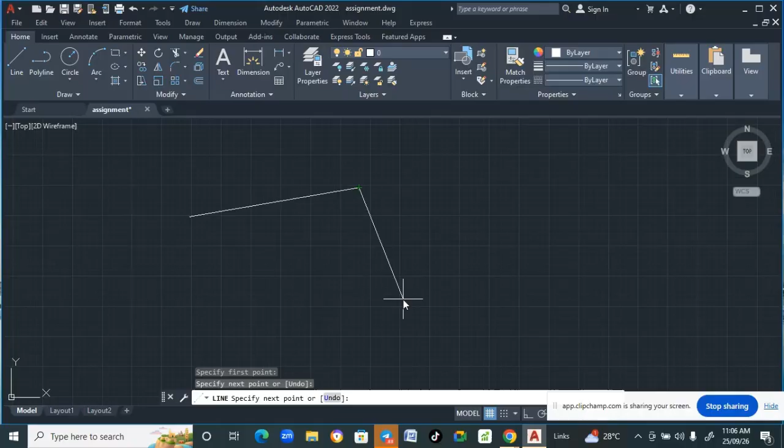Let me start with different ways you can activate the draw line command. You can start from here and just click on line. Remember, whenever you activate the command, look at the command line - it says specify first point. Wherever you click becomes the first point, and wherever you click again becomes the second point. Anywhere you click again becomes another point. If I decide to close this object, I can just click on close, and it closes.

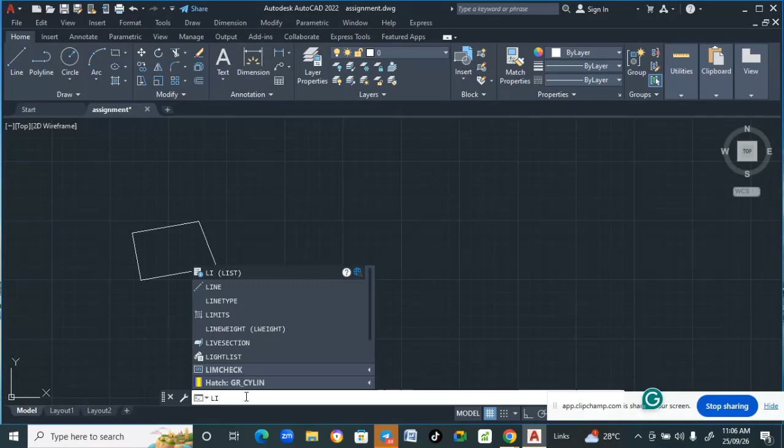Now I can also initiate it from the command line using my keyboard - just draw line, or type LI. If I click on line, the line command is activated. Again, the command line says specify first point. If I click here, it becomes the first point. If I click here, it becomes the next point, and the next, and the next. I can decide also to close it. Then I click enter to deactivate the command.

We can also come to the main menu here, click on draw, get online, and the line command is activated again. Specify the first point - if I click here, it becomes the first point. The next place I click becomes the next point, and the next, and the next. And then I can also close.

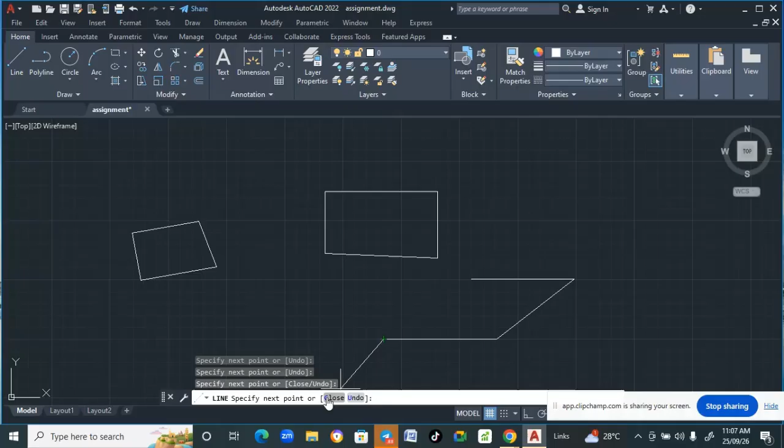Now let me come here. If you come here, you see construction line, you see ray, you see multi-line. It's important for us to understand that line command and construction line are not the same. Construction line is an endless line that you use to create boundaries. You don't use it for drawing. Let me give you an example.

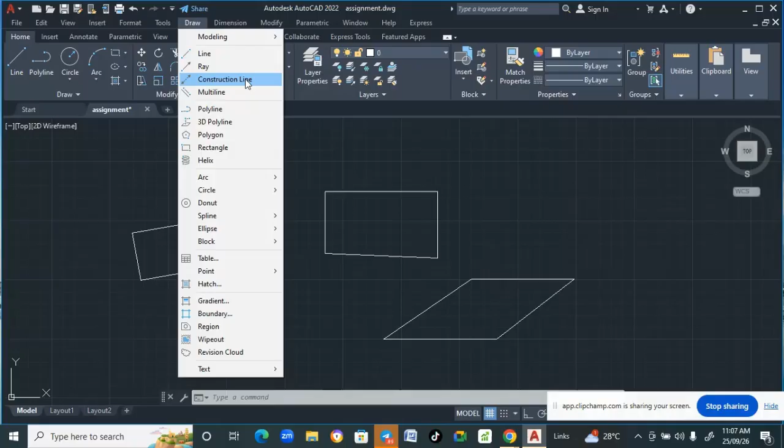If I click here now, the construction line is activated - it says specify first point. If I click here, it becomes the first point, and I click here, it becomes the second point. Then I click enter, and we have an endless line. This line is endless - what it simply did is divide my drawing space into two. I can do some drawings here, and some drawings here. But it is not part of the drawing. So when you want to draw, the actual line you use is the line command.

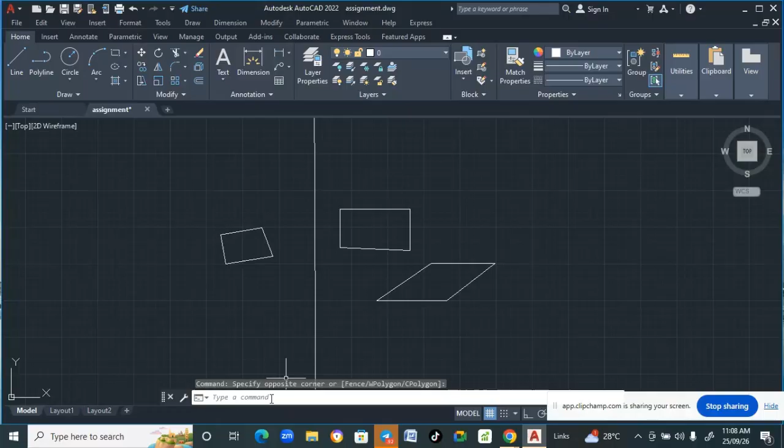Or you just type line here. Okay, so let me clean - just highlight and click delete. So the next thing I want to show you is how do you now make your line dimensioned? Because in engineering or in sciences, you don't just draw a line - you draw a line with specific dimensions.

Let me start by using this command now. If I activate the line command and it says specify first point, and I click here as the first point, and I want my line to go in the vertical direction, I can just point my mouse in the direction I want the line to go - don't click, just point it in the direction - and I type the dimension, let's say 100mm, and click enter. Okay, so you see this line is 100mm.

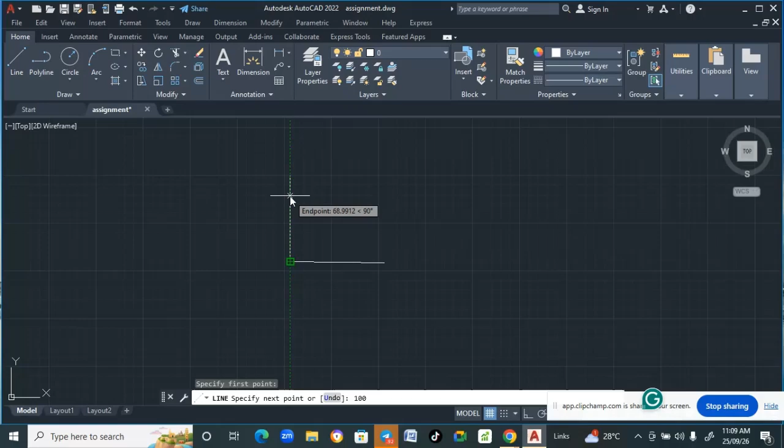Okay, if I activate the line command again and I want to draw another line, but this time horizontal, I just point the line in the horizontal direction, I type 100 again, and press enter. Okay, so it gives me a second line that is also 100mm, this time in the horizontal direction.

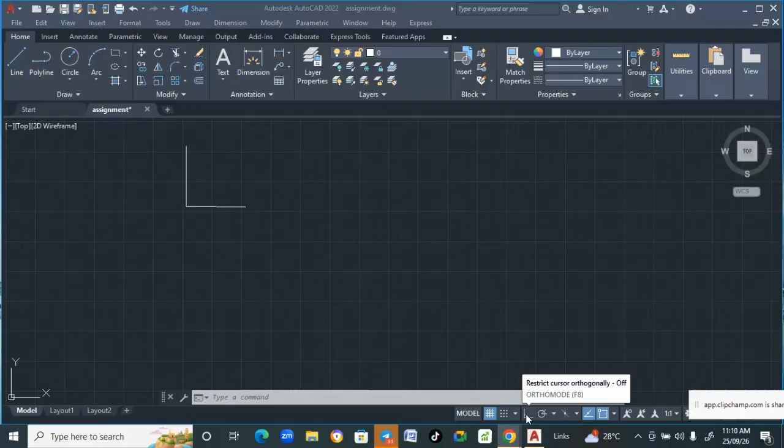Now let me teach you something else. If you want to draw a perfectly straight line, you have what you call ortho mode. Ortho mode helps you make your line perfectly straight, but this time it must be either horizontal or vertical - you don't use ortho mode to draw an inclined line. If I click on it, it turns on and changes to light blue. So if I activate the line command again now, you see that the line, even if my hand is shaking, will be perfectly straight.

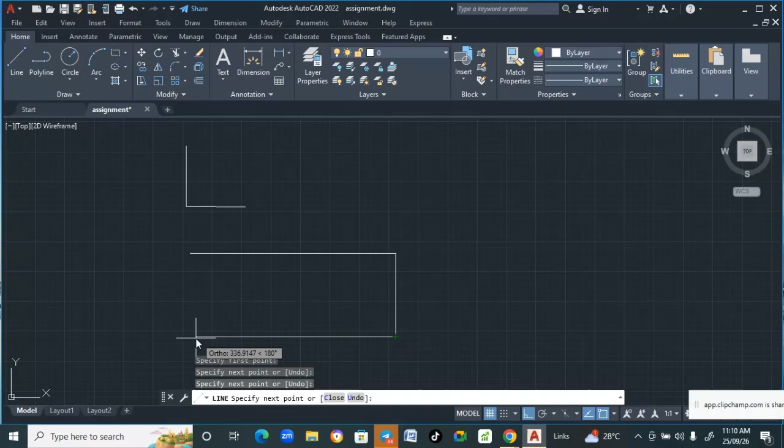If you see, this gives you a perfectly straight line. But it's gonna be either vertical or horizontal. You can't use it to draw an inclined line. So that is Ortho mode. Use it to draw a perfectly horizontal or vertical line.

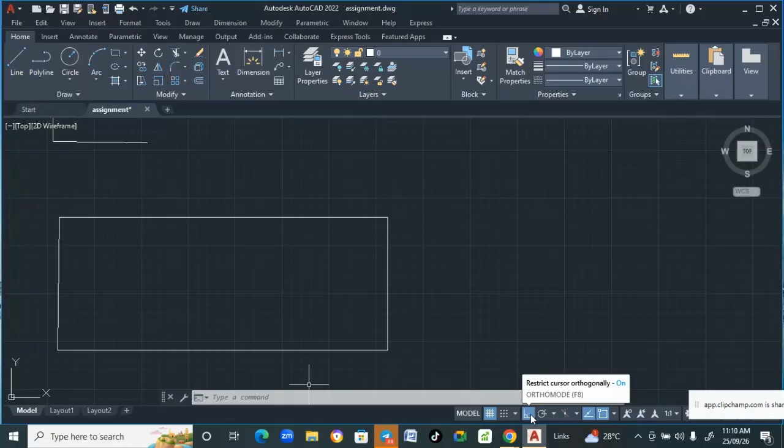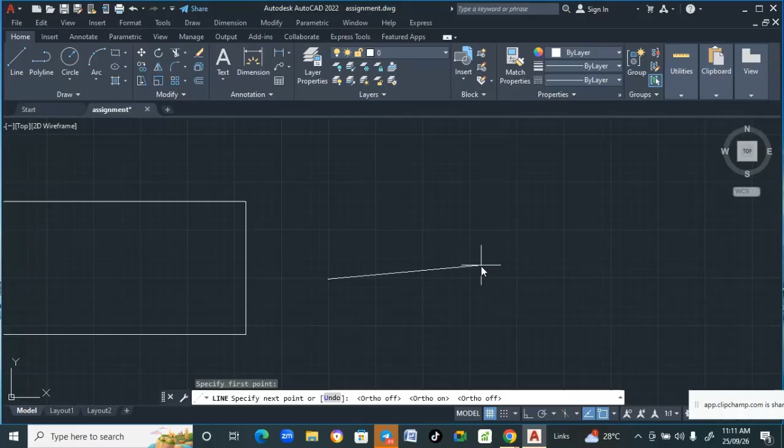You can also activate it using F8. So it's on now. If I deactivate it, I just click on F8 again - you see it's activated, and if I click F8 again, it's deactivated. So you can activate Ortho mode by clicking here or by simply typing F8 on your keyboard.

Now let me teach you some other things we need to do - what you call object tracking. Use object tracking to draw. So if you put object tracking on, you'll be able to draw at a determined angle.

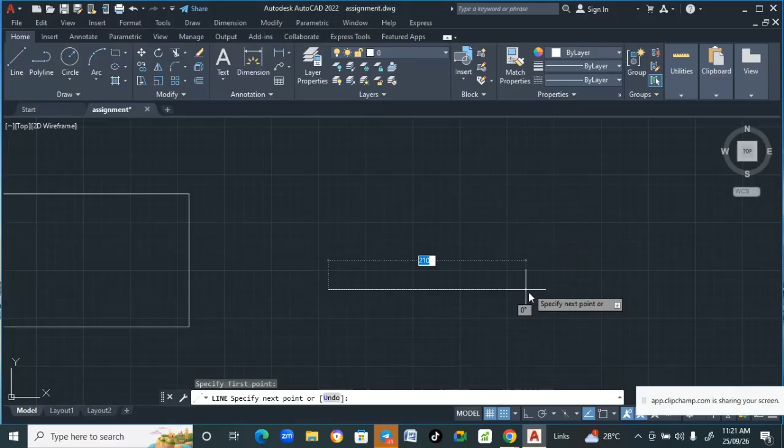If you see, I just activated a line and you see an angle. I want to draw the line at an angle of 30 degrees, for instance. I just move it to get 30. If I click here, the line has been drawn at an angle of 30 degrees from the horizontal. I can activate another line and start again.

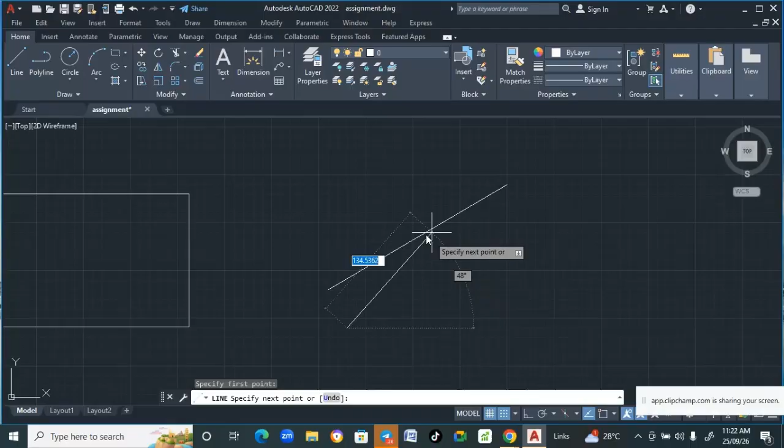I can draw it to an angle of 90 degrees, that is completely a vertical line. So this line is completely vertical - it's drawn 90 degrees from the horizontal.

Again, we can draw a line. For instance, activate a line, and I want to draw the line, say, at a length of 100 millimeters, and I want to draw it at an angle of 45.

Let me redo it. I activate a line, and I started the line at 100 mm, and I want to draw it at an angle of 45 degrees. So you see this line now is 100 mm and is drawn at an angle of 45 degrees from the horizontal.

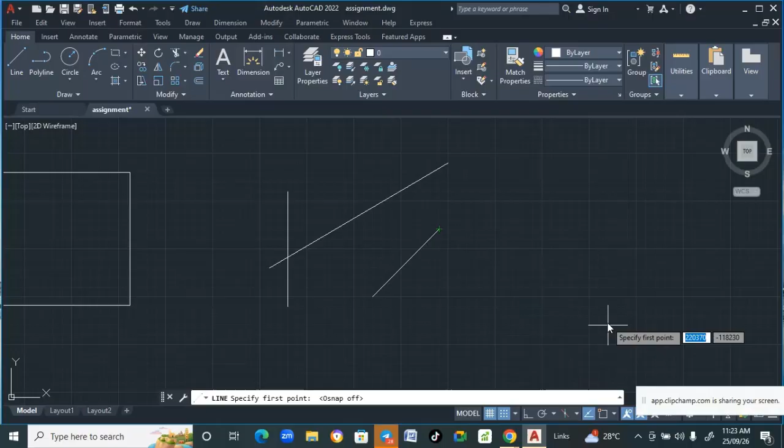Then let me also teach you how to use object snap. Use object snap to join two lines perfectly well. If I activate a line again and want to join it with this - with object snap on, let me put it off now. If I bring this here, you don't know whether it is joined or not. If I draw now, for instance, if I increase this, you see it joined.

But there are some cases where you increase it and find out it didn't actually join. So the easiest way to join lines is to put object snap on, so when I bring this thing close, there's an indication that it's joined, and AutoCAD will simply join it. You see, it's joined. And if I want to join it here, I bring it here again, and it joins.

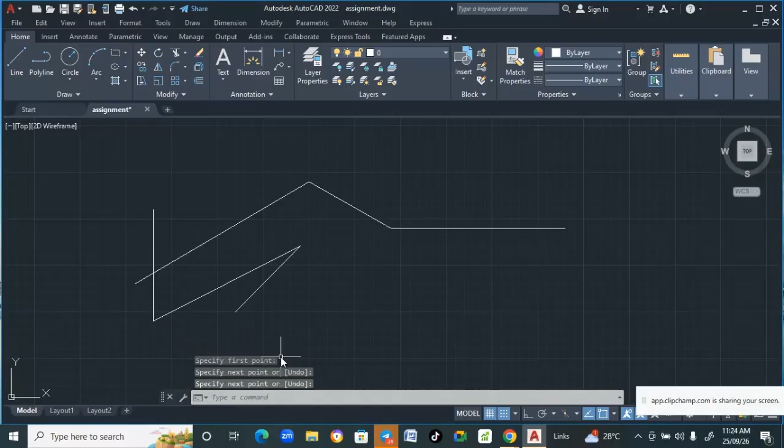So object snap helps you easily join two lines together. You don't join two lines without putting the object snap on. You don't try to draw at an angle without putting object tracking on. You don't try to draw a perfectly straight line horizontally or vertically without putting the Ortho mode on.

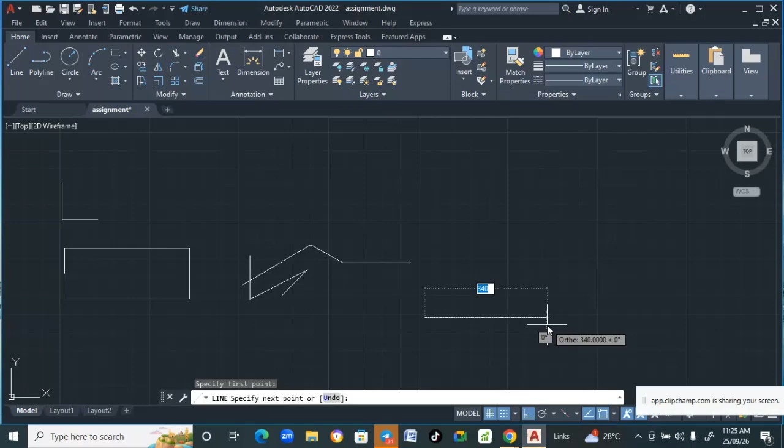Also, if you want to draw a dimension line, make sure you activate the line, move the cursor in the direction you want it to go, and then, if you want it to go at an angle, you type the angle - let's say 45 degrees - and you just get 45 degrees because the object snap is on.

And you now type the dimension, let's say 200 mm, and press enter. You see, it gives you a line of 200 mm inclined at an angle of 45 degrees from the horizontal.

So just practice the drawings and the steps I've just taken right now, and at the end of the day, you will master how to draw perfectly straight lines, inclined lines, lines at an angle, how to join lines, and how to draw lines of a specific dimension. Practice, and if you have a question, let me know.